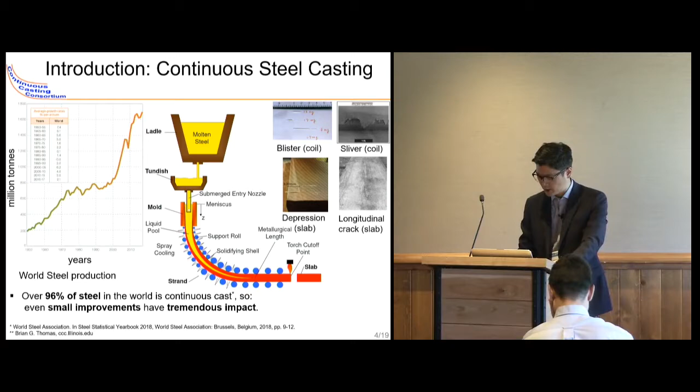Also, argon gas is injected into the molten steel pool to prevent nozzle clogging, but non-optimized casting conditions can make the bubbles and inclusions entrapped by the solidifying steel shell. Another problem, initial solidification defects, may be caused by the non-uniform superheat distribution near the solidifying steel shell. And there are depressions and cracks caused by the undesirable thermomechanical behavior of the solidifying shell.

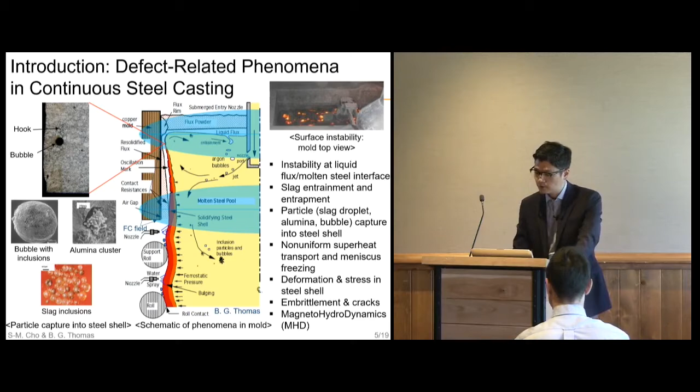But all these defects can be reduced if electromagnetic systems are correctly applied to this system. Next slide will show some details of these electromagnetic systems. Okay, as you know, steel is a conducting material, so applying a magnetic field induces current in the molten steel, and interaction between the magnetic field and induced current finally generates the Lorentz force in the molten steel.

So to reduce the defects explained in the previous slide, several electromagnetic systems have been used, to control the flow pattern, surface instability, superheat transport, initial solidification, particle transport and capture, grain structure, internal quality, and steel composition distributions. So we will show some of our results here for double-ruler EMBr static magnetic field and mold electromagnetic stirring moving field effects on the multiphysics phenomena.

In our research field, computational modeling is an essential tool because both experiments using the lab scale model and the real plant measurement are extremely limited due to the harsh environment, the huge size of the domain, and the many process parameters which should be considered for this study.

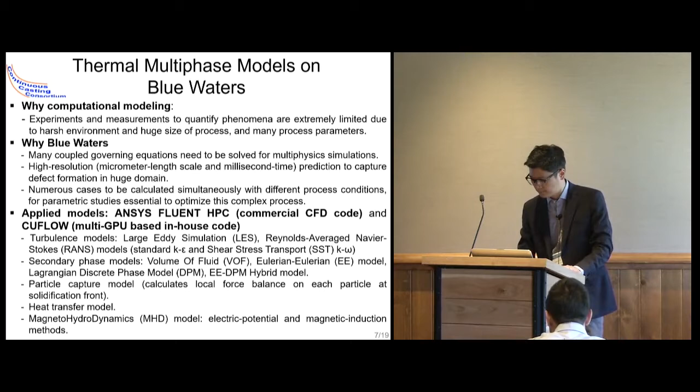We have tested both the CPU version and the GPU version of the in-house code CUFlow developed by our collaborator, Professor Vanka, and co-workers at the University of Illinois. CUFlow has been developed to solve the governing equations for three-dimensional transient multiphase flow and particle transport and capture, employing the LES, VOF, DPM, the particle capture model, and the MHD models. Multi-GPU-based CUFlow was recently implemented on the Blue Waters XK nodes, and we achieved greater performance.

Multi-GPU CUFlow testing on the Blue Waters XK nodes showed a good speedup, 40 times faster compared to the workstation simulation, and this enabled us to need less than 2 days for a 30-second LES simulation of the MHD flow in a caster domain with 14 million cells. So it's a huge benefit to use Blue Waters.

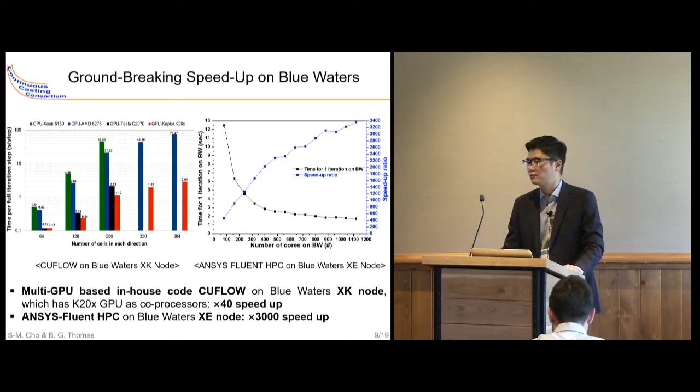And we also tested ANSYS Fluent on Blue Waters XE nodes. We tested LES coupled with the VOF model, and that showed over 3,000 times faster compared to the workstation simulations. So this speed breakthrough enabled us to consider a much finer domain and smaller time scale. And we can also calculate many cases at the same time. This is very important for the parametric study to figure out the practical strategy to improve this process and find some solution to reduce the defects.

Using both CUFlow and Fluent on Blue Waters, we developed high-resolution models of the defect formation mechanism and electromagnetic force effect in continuous steel casting. From the model simulation, we can get deeper insight into the defect formation mechanism and provide practical strategies of electromagnetic system operation to reduce the defects.

Today, I'm going to talk about some of our research projects using Blue Waters as follows: top surface interface variation effect on the slag entrainment defect using LES coupled with VOF; bubble behavior and size distribution using the new hybrid multiphase model, EE-DPM; argon bubble transport and capture with the electromagnetic braking effect using LES coupled with the DPM particle capture model and the electric potential MHD model; and initial solidification defect formation modeling using the k-epsilon model and the heat transport model.

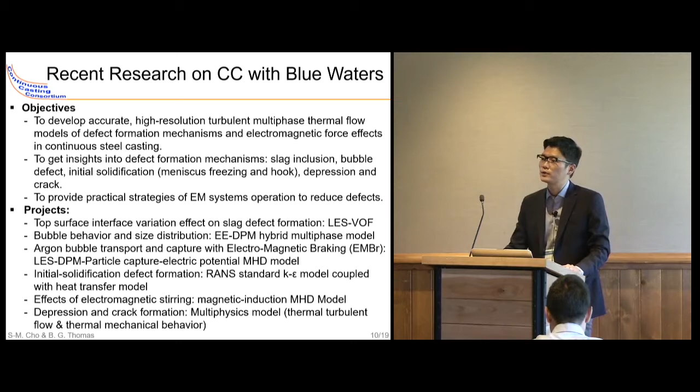And we also investigate the effect of electromagnetic stirring on the initial solidification defect using the magnetic induction MHD model. And finally, we simulate depression and crack formation using multiphysics modeling, which couples the thermal turbulent model with the thermal mechanical behavior model.

This slide shows how our developed models are used and how they are strongly related. For example, bubble size distribution from the EEDPM model is used as the input data for the particle capture model simulations. And then the MHD model is coupled with this particle capture model, so we can investigate the effect of the electromagnetic braking on the particle transport and capture.

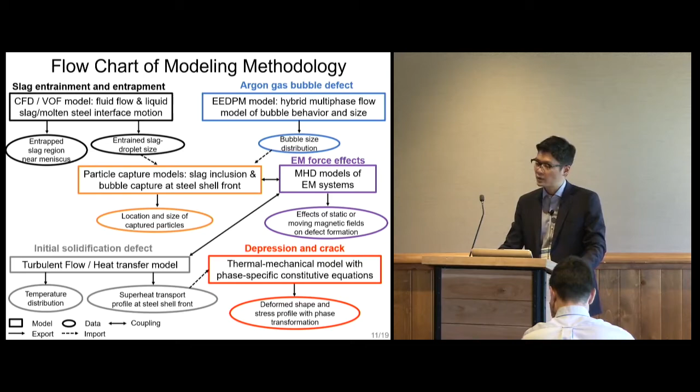Another way, initial solidification defects can be studied considering electromagnetic field effects by coupling the thermal turbulent model with the MHD model. Let me show some of our modeling results.

This slide shows our LES coupled with the VOF simulation to quantify the transient liquid slag and molten steel interface and slag entrainment defect formation. Jet flow from the nozzle is wobbling, showing the up and down motion in casting directions. And this causes the instability at the liquid mold flux and molten steel interface.

Sometimes this instability is so severe that the liquid mold flux is entrapped by the solidifying steel, resulting in the critical defect on the final steel product as shown in the right bottom photos.

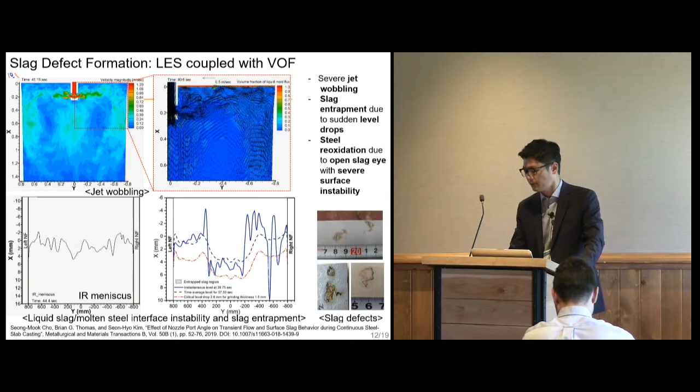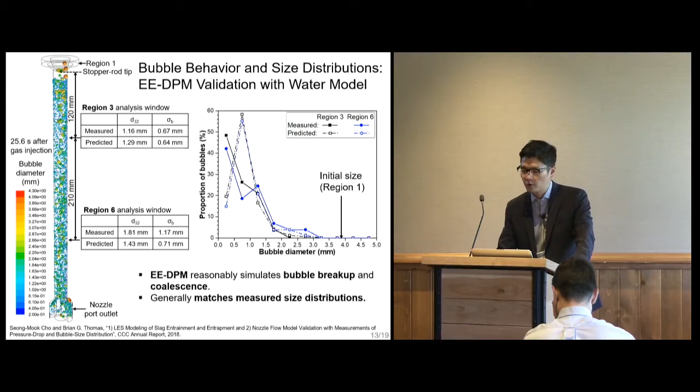We used the new hybrid multiphase model, EEDPM, to simulate the bubble behavior, including the bubble pocket formation, shearing off, volumetric expansion, breakup, accumulation, and coalescence. The model can calculate the bubble size distribution change more accurately, considering all these phenomena. The model was validated with water model experiments.

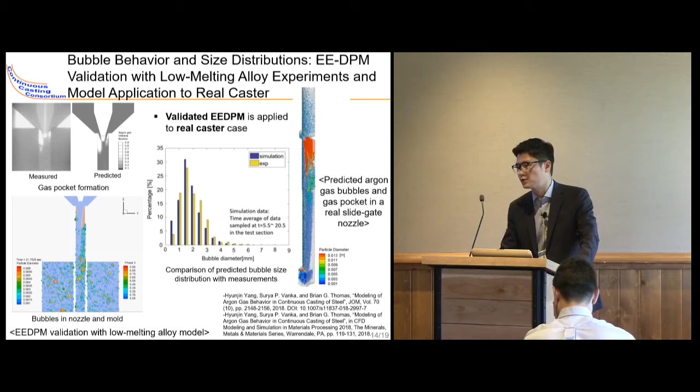Also, this EEDPM model was validated with the low melting temperature alloy experiments showing the gas pocket locations and size distributions. And then the validated model was extrapolated to calculate the real argon bubble behavior and size distribution in the molten steel in a real caster nozzle.

Next, we simulated the transport and capture of the bubbles at the steel shell front using the LES coupled with the DPM particle capture model and MHD model. From this model simulation, we can consider the effect of the EMBR on the bubble capture defect formation. The model was validated by comparing with plant measurements of the real defects in the steel plant.

We found that with the EMBR, fewer bubbles reach the solidifying steel shell, and fewer bubbles go into the deeper region, as shown in the left two figures. So EMBR increased flotation and reduced the bubble capture into the steel shell. This means fewer surface or internal defects with the EMBR effect.

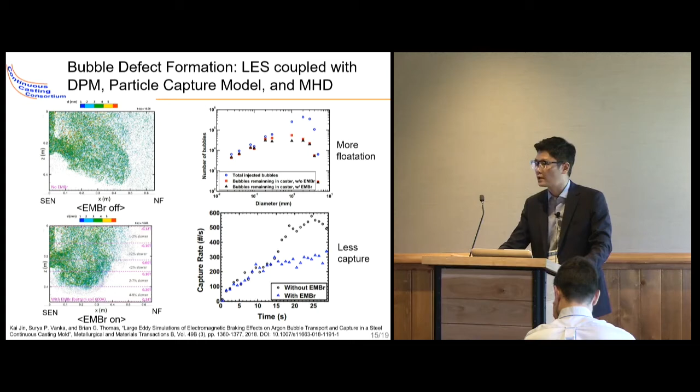We also investigated the initial solidification defects such as meniscus freezing, hook formation, and longitudinal crack formation near the meniscus using the RANS-based model coupled with the heat transfer model. We found that the distribution of the superheat flux around the mold perimeter can be very non-uniform due to the unoptimized mold flow pattern. In particular, superheat is unable to reach the meniscus corner region. This can lead to deep hooks and longitudinal crack formations.

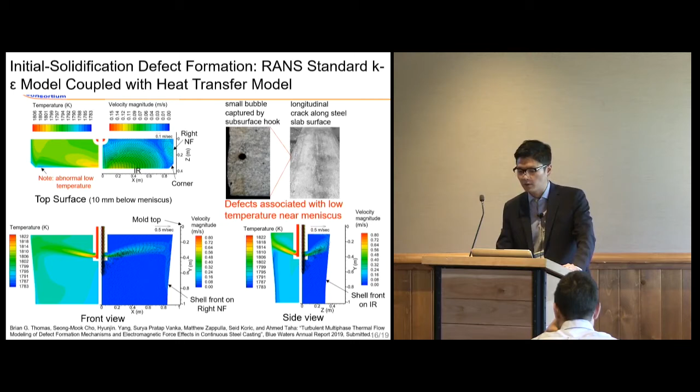In addition to this research, we investigated the effect of the mold EMS on the mold flow pattern, temperature distribution, and the heat flux and superheat distribution using the magnetic induction MHD model. The mold EMS has a strong phase shift, and that field creates the rotating field around the perimeter of the mold wall, as shown in the videos.

So high Lorentz force around the mold wall rotates the flow near the shell front, and these stirring actions make the temperature and superheat flux more uniform at the meniscus region, including the corner regions. You can see this effect by comparing the dashed lines around the shell front with the solid lines. This effect is expected to reduce initial solidification defects so long as the magnetic field strength is within the optimum range, which the model is being used to predict.

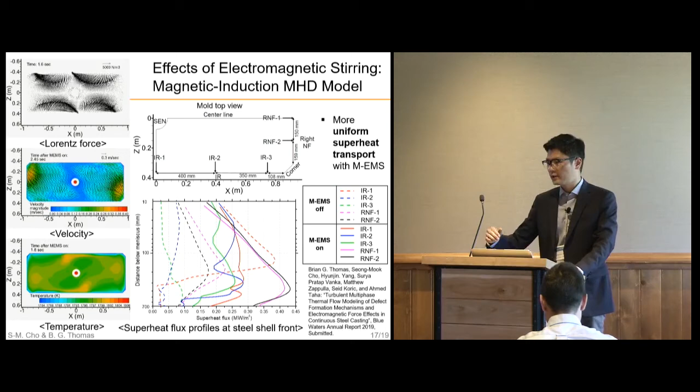Finally, we used the calculated superheat flux profile at the shell front as input data for the modeling of thermomechanical behavior of the solidifying steel shell. The thermomechanical model considers the phase transformation during steel continuous casting. And from this model simulation, we can quantify the very important mechanism of depression and crack formation on the steel slab surfaces.

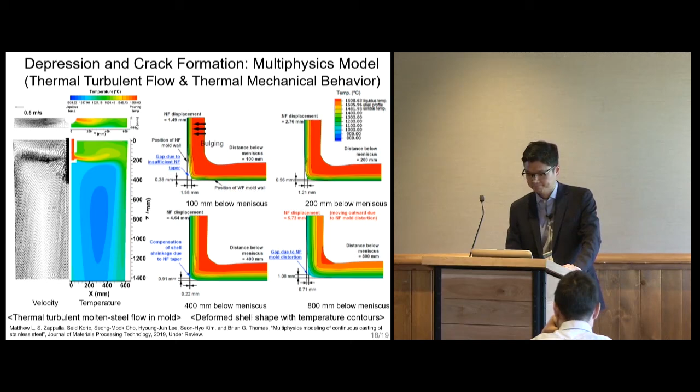Let me summarize my talk. We achieved the speedup breakthrough on Blue Waters for the high resolution simulations of continuous steel casting. ANSYS Fluent HPC showed 3,000 times faster, and the multi-GPU based in-house CU-FLOW showed 40 times faster on the XK node. And with these Blue Waters resources, we conducted various multiphase simulations of defect formation and electromagnetic effects for continuous steel casting.